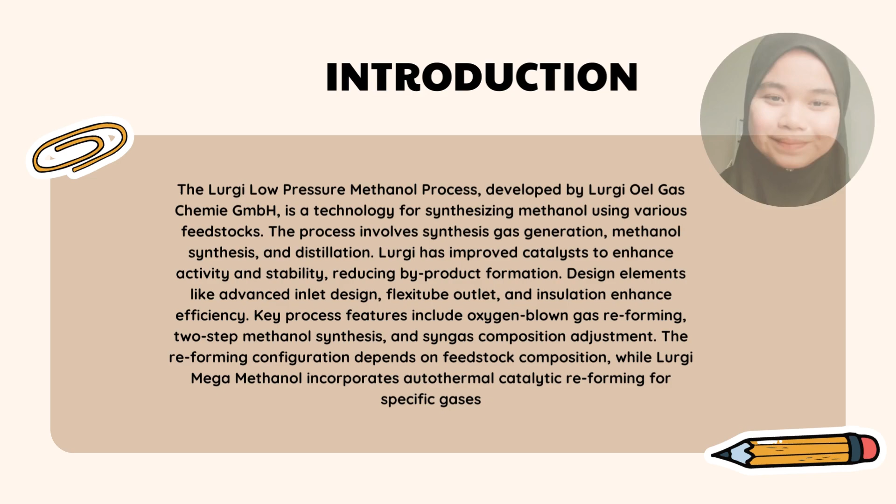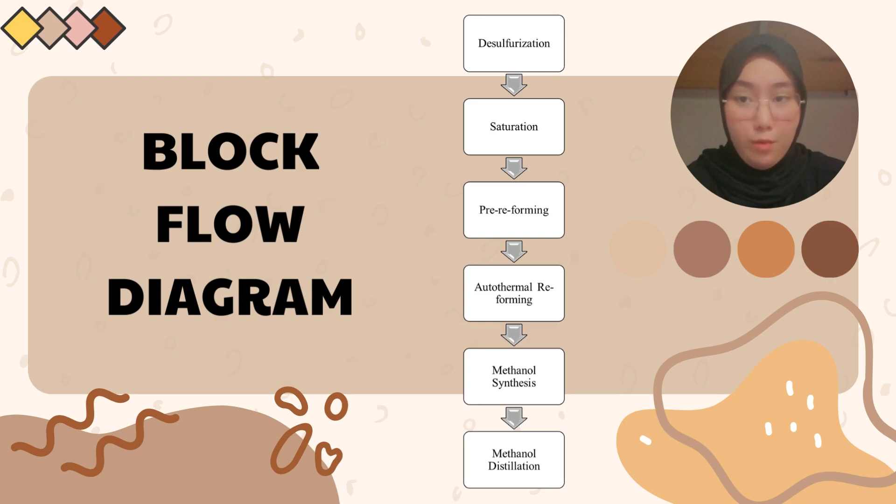As the block flow diagram shows, first we do desulfurization, and then we do saturation. Next is pre-reforming, followed by autothermal reforming. After that, we do methanol synthesis, and last but not least, we do methanol distillation.

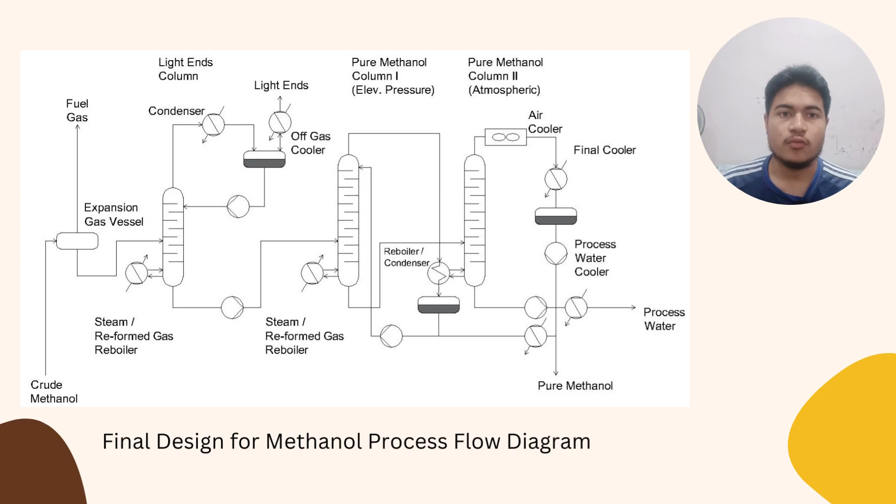Desulfurization. Catalyst activity can be affected by the presence of sulfur in the feedstock gas. To protect the catalyst, the feed must be desulfurized first. Desulfurization operates at approximately 350 to 380 degrees C in the reactor. Zinc oxide is added to the feedstock along with hydrogen sulfide to produce material as in the equation below: H2S plus ZnO produce ZnS plus H2O. If the feedstock contains organic sulfur material, it must be hydrogenated before desulfurization first with a methanol gas rich in hydrogen on cobalt molybdenum catalyst.

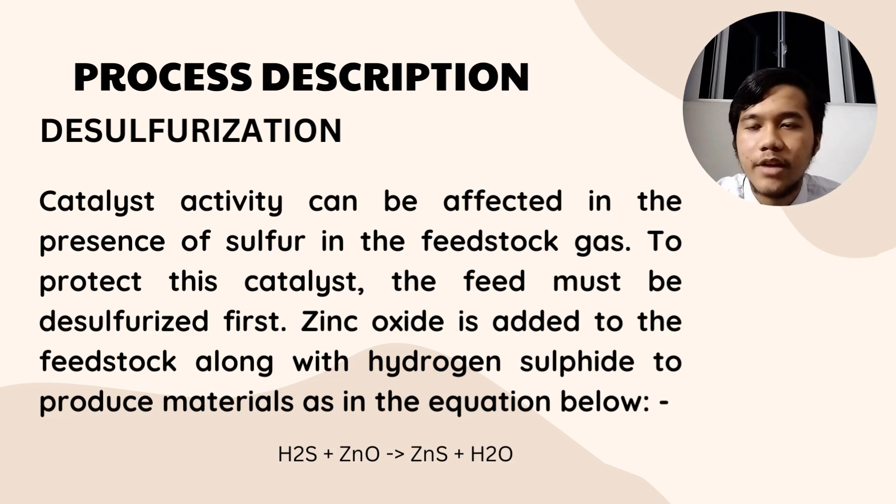Saturation. Feed gas goes into the saturator for saturation with a large supply of water required for the reforming reaction. After the process of condensation and distillation, hot water is passed over the saturator. This water will cause a downward movement with the water below moving upwards and cooling it before being fed back into the saturator.

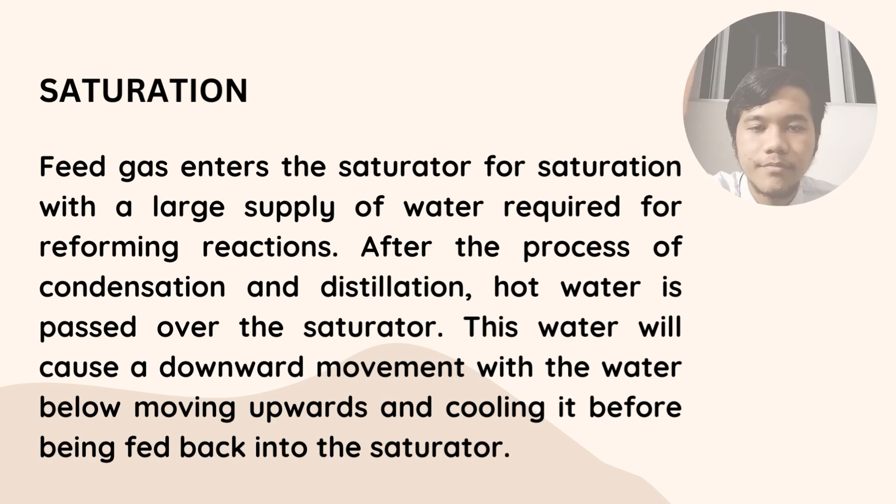Pre-reforming. If the feedstock contains fractions of higher hydrocarbons, the steam reformer catalyst can be affected by carbon deposits owing to cracking reactions when operating at a low steam-carbon ratio. This should be avoided by pre-reforming the feedstock in a pre-reformer. The conversion of higher hydrocarbons in an adiabatic reactor produces a gas rich in methane and hydrogen that is perfectly suitable for further steam reforming. The fixed bed type pre-reformer is arranged between the process feed superheater and the steam reformer.

The desulfurized feedstock with process steam added is routed through the catalyst bed, where almost all higher hydrocarbons and a small percentage of the methane are reformed with steam according to the following equation: CO plus 3H2 produce CH4 plus H2O. Pre-reformed gas is produced at 380 to 480 degrees C. Pre-reformed gas contains only a few parts per million of hydrocarbons higher than methane and allows for a reduced steam to carbon ratio. This can reduce the size of the steam reformer significantly.

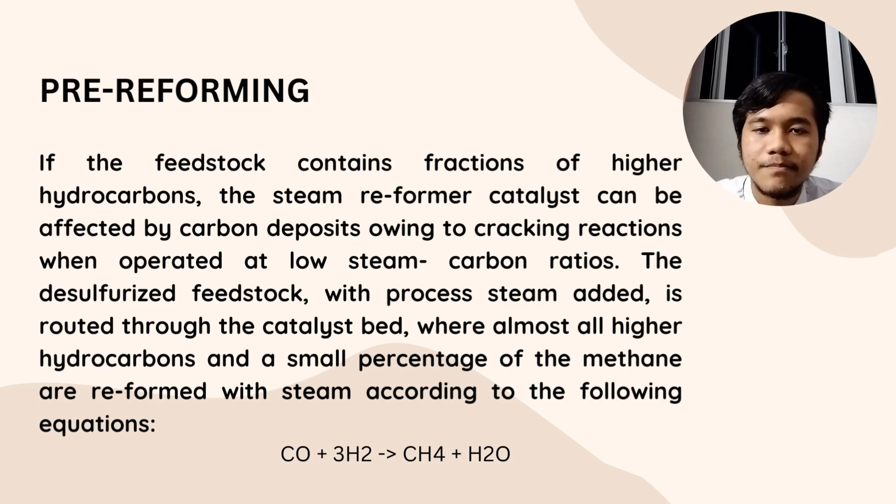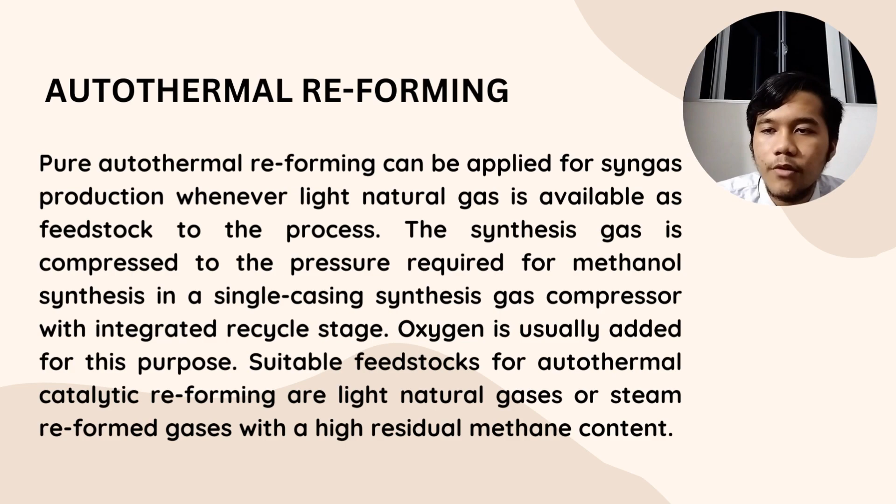Autothermal reforming. Pure autothermal reforming can be applied for syngas production whenever light natural gas is available as feedstock to the process. Reformer outlet temperatures are typically in the range of 950 to 1050 degrees C. The synthesis gas is compressed to the pressure required for methanol synthesis in a single casing synthesis gas compressor with integrated recycle stage. Gas flow and temperature profiles are simulated with the objective of designing burner and reactor as an integrated unit. The autothermal process produces the heat required for gasification through partial combustion of the feed gas to be converted in the reactor. Oxygen is usually added for this purpose. Suitable feedstocks for autothermal catalytic reforming are natural gases or steam reformed gases with a higher residual methane content.

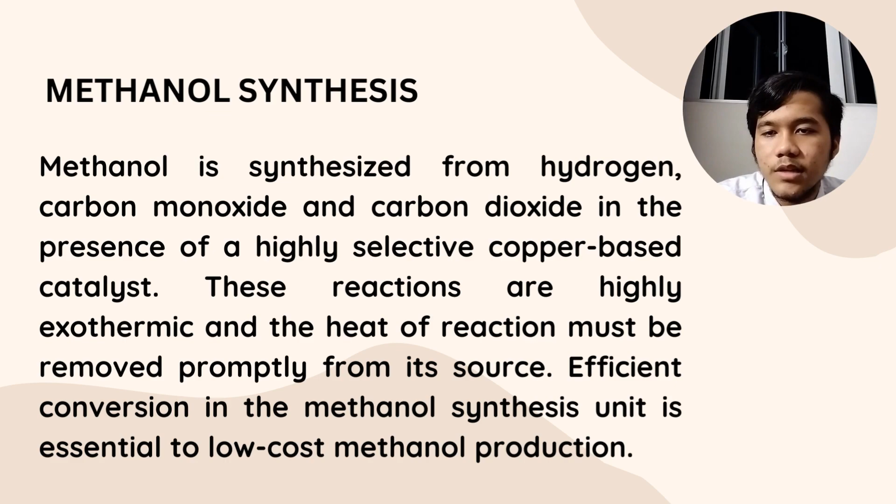Methanol synthesis. Methanol is synthesized from hydrogen, carbon monoxide and carbon dioxide in the presence of a highly selective copper-based catalyst. The principal synthesis reactions are as follows: CO plus 2H2 produce CH3OH, and CO2 plus 3H2 produce CH3OH plus H2O. These reactions are highly exothermic and the heat of reaction must be removed promptly from its source. Efficient conversion in the methanol synthesis unit is essential to low-cost methanol production. In addition, optimal use of the reaction heat offers cost advantages and energy saving for the overall plant. Nowadays, two types of catalytic fixed bed reactor are used in industry: the steam raising reactor and the gas cooled reactor.

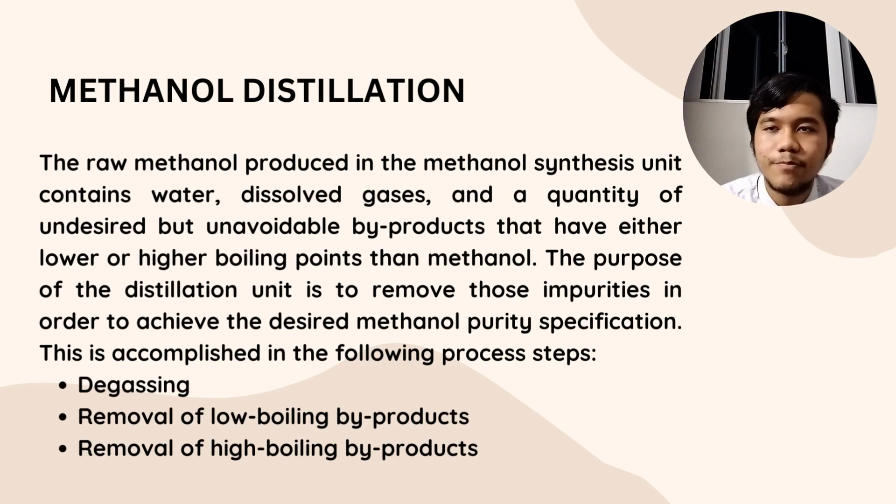Methanol distillation. The raw methanol produced in the methanol synthesis unit contains water, dissolved gases, and a quantity of undesired but unavoidable byproducts that have either lower or higher boiling points than methanol. The purpose of the distillation unit is to remove these impurities in order to achieve the desired methanol purity specification. This is accomplished in the following process steps: degassing, removal of low boiling byproducts, and removal of high boiling byproducts. Dissolved gases are driven out of the raw methanol simply by flashing it at a low pressure into the expansion gas vessel. Removal of light ends and remaining dissolved gases is carried out in a light ends column.

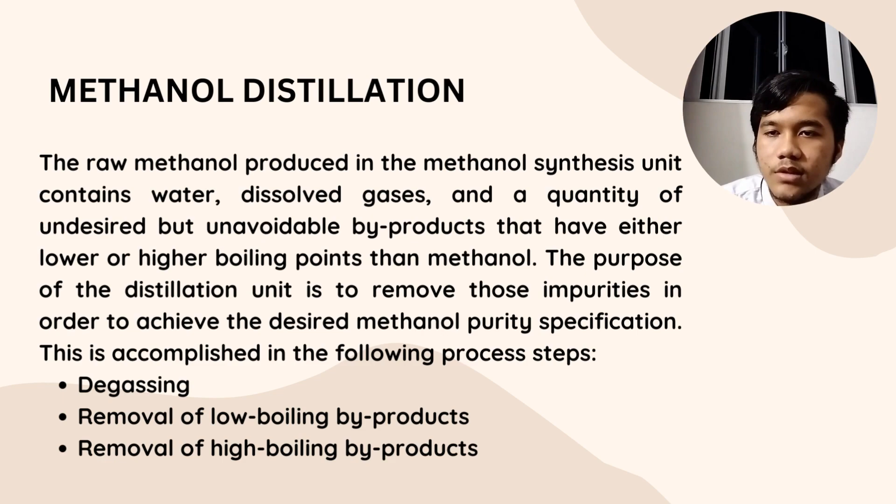Finally, the methanol is separated from the heavy ends in the pure methanol distillation section consisting of 1 or 2 columns. The split of the refining column into 2 columns allows for very high single train capacities. Methanol purity remains unaffected, whereas the single train capacity, consumption of steam and investment costs depend on the distillation concept.

Conclusion: the production of methanol must go through various methods and processes. This production plant involves the synthesis of methanol, an important chemical raw material. It must go through many plant units, such as desulfurization, saturation, pre-reforming, autothermal reforming, methanol synthesis, and methanol distillation. Each of these units has its own function in the production of methanol. These units are also interconnected with each other in a process flow diagram for the process plant. The result of this production will be pure methanol that can be used for other industries.